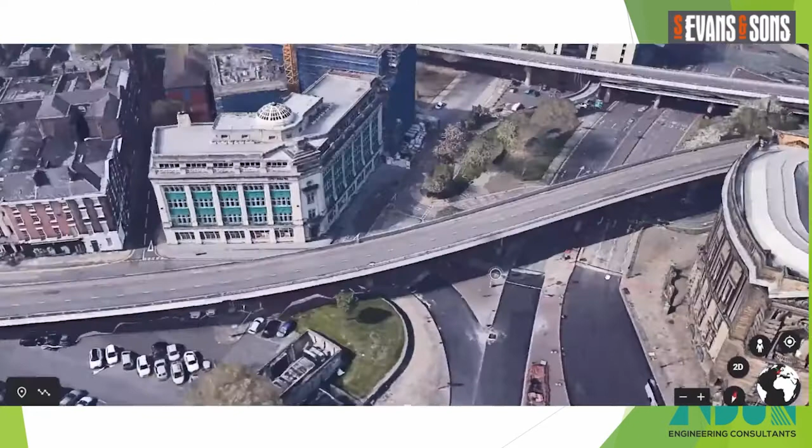That's the Mersey Tunnel, so that is in very close proximity to the project. This is the South flyover we're looking at. This is the World Museum in Liverpool, again very close and a sensitive neighbour to the project. We also had the footbridge that crossed underneath the flyovers, which was demolished as one of the first parts of the work. And now we're running back along the north flyover, and here is a university building.

And then just below, or to the west end of the north cantilever of the north flyover, is accommodation, again in very close proximity. Not a great deal of room between the flyovers and all the constraints in the city centre, plus two main roads and a railway in a tunnel underneath.

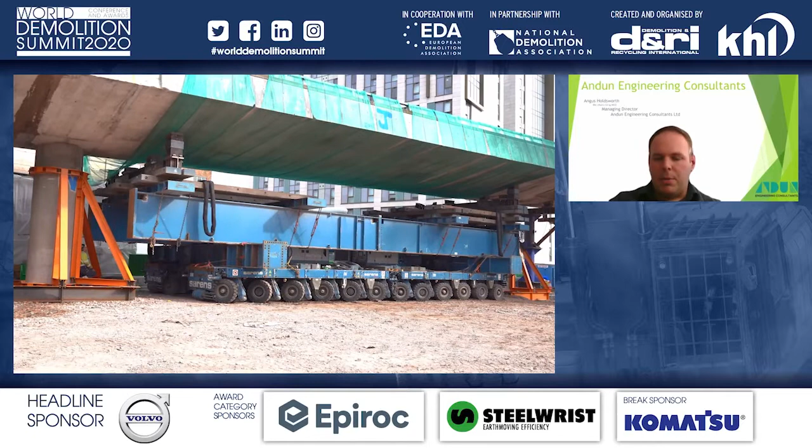Now, I've tried this presentation a few ways round. The best way is to view the video first, which gives you a flavour of what it is we're talking about. So this is an SPMT here being driven into position underneath one of the sections of the viaduct. SPMTs were used throughout to move parts of the viaduct around. That's column propping, which we'll touch on later. That's propping to the mid-span of the structure, or one of the spans of the structure.

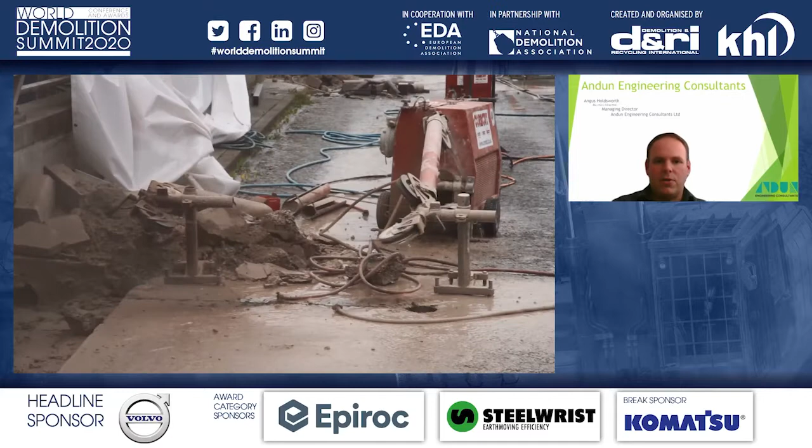That's the guys cutting it up. It was all diamond wire sawed up into pieces on top of the SPMTs and moved out. There was an awful lot of cutting on the project. That's one of the first cuts completing. That's an SPMT showing what it does best, which is move heavy loads in a very, very controlled manner in pretty much any direction you can think of. So that's with a 450-ton lump sitting on top of it.

Moving over to the SAR lifts, where it was then lifted up, dropped to the ground. So that's a SAR lift there, which we use to lift it off the SPMT, lower it to the ground, and then cut it into pieces, as you'll see throughout the presentation. That's one of the pieces being taken out onto the back of wagons and away to a site a few miles away, where it was then broken up for hardcore to be recycled as part of new road construction.

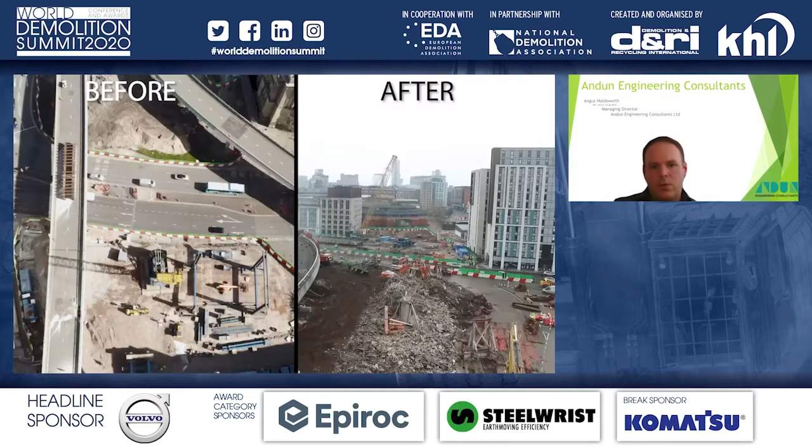The last four spans of the structure were taken out in a traditional manner because of proximity of a gas main that we couldn't get approval to load with the SAR lift. So it was all done traditionally, the last four spans on the north and the south. And you can see it makes quite a big difference. I wish they'd done the video a little bit later on with the site gone completely, but there you go, you get the idea.

Okay, so the structure itself, there were two flyovers, north and south, both around 250 metres in length each. The north viaduct up here was pretty much on a straight alignment. The south was on a curve. Fixed bearing in the centre, and then each of the piers were on roller bearings that allowed longitudinal movement and expansion of the structure. So logically, you'd want to start at the ends and work towards the centre. Unfortunately, we weren't allowed to do that, which you'll see later on.

Structure was up to 14 metres in height, an open structure, quite typical of 1960s vintage in the UK, post-tensioned, slender, long span. Columns are about 1.5 metres diameter, and as I mentioned earlier, the viaduct and the base of all of the piers, apart from the central fixed one, were on longitudinal bearings that allowed movement, which then posed stability issues when it came to the demolition sequence. There's also a footbridge here, which was in place for quite a lot of the north span.

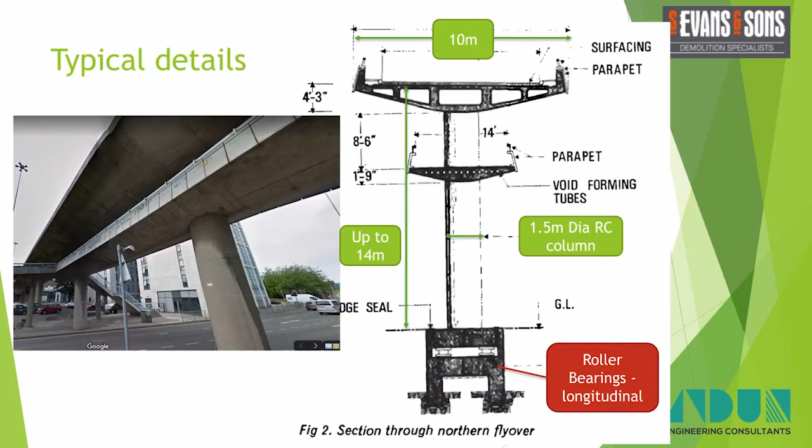Now, this structure was post-tensioned. The records from the time were not particularly clear. So it's a question as to, were they post-tensioned in individual spans? Were they pairs post-tensioned? There was a lot of uncertainty, which drove a lot of the decisions on the project. Then there was also the question, were the tendons grouted or non-grouted?

The decision was made that we would treat it or take into account the potential for it to be non-grouted. Non-grouted meaning that if you cut through the tendons, they would release and you'd lose any post-tensioning effect. To counteract that, we had a propping system, so we had a shear prop and a central prop.

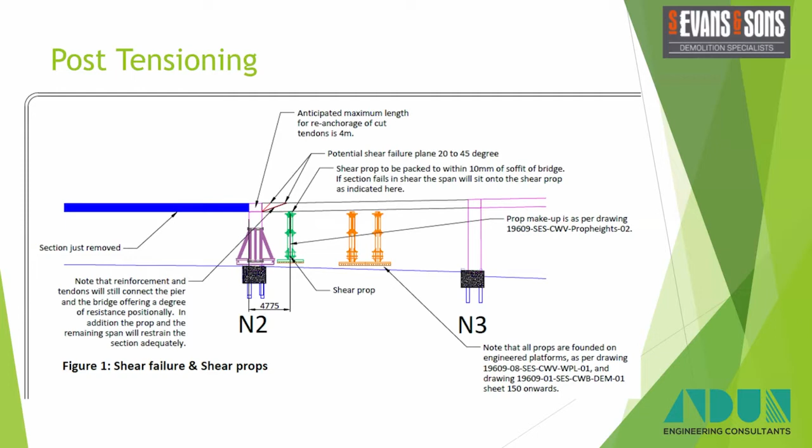This basically meant that if we lost the post-tensioning force, the bridge would sit on those props and would not cause a catastrophic failure. You can also see there the propping around the columns. Then, in simple terms, we drove SPMTs underneath it and we cut it into sections and transferred them off. So the sequence was fairly convoluted.

As I said earlier, logically you would work towards the fixed pier in the centre of the viaduct. We weren't allowed to do that due to client constraints, so we actually had to start off with this pair here. Then we had to do the pair over the road, which included the fixed pier, and then that bit there. So stability was an issue throughout.

This was then followed up by starting with the fixed pier and then working our way back down the structure. Again, stability issues that we had to take into account throughout. The props themselves were detailed specifically to fit and allow the SPMTs to get into place. So if the structure had sat down onto the props, we had to have a system where we could get the SPMTs into place, which made it fairly tricky.

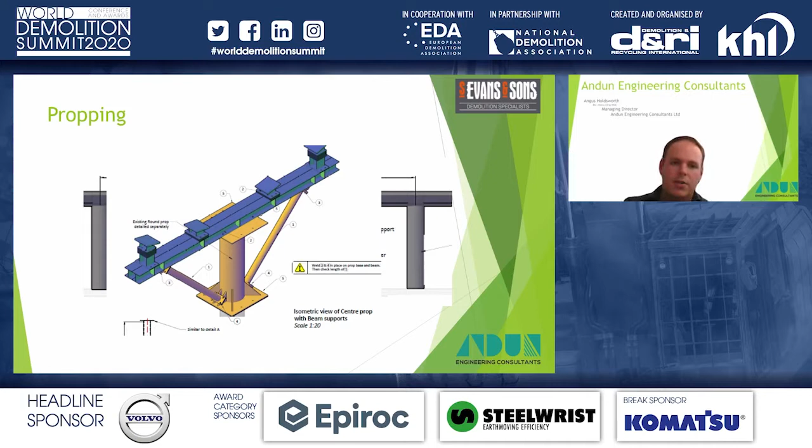So we came up with this central prop with a header beam and a series of plates that then picked up the radius under here. So there you go, you can see the propping in place, shear prop, column prop, half a column prop, and then the mid-span prop in there, and then the SPMTs could drive in here either side, same the other side, and then you can still put your arrangement in place that allowed you to carry on the demolition should the worst happen.

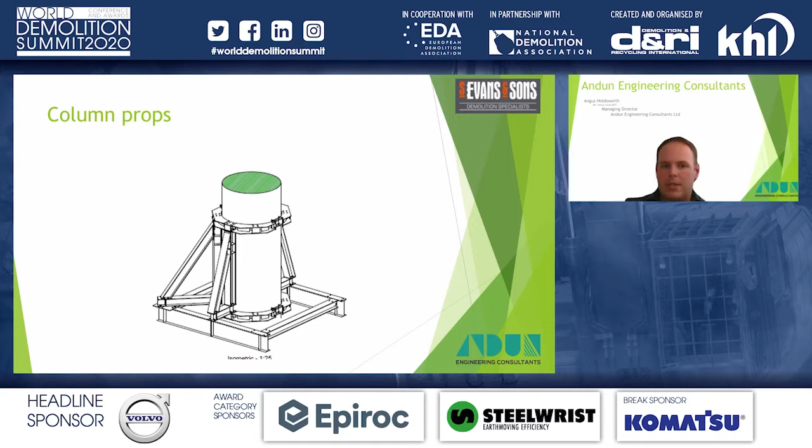Columns were on longitudinal roller bearings, so we had to come up with an arrangement to clamp those, which meant that you could slice out the bridge sections either side and leave the column and the crosshead on top. The crosshead in itself was around 50 tonnes, so with the column you were talking 60, 70 tonnes, and that solution there worked quite nicely. You can see one in place there. This one we've cut through already, so it was doing its job there already.

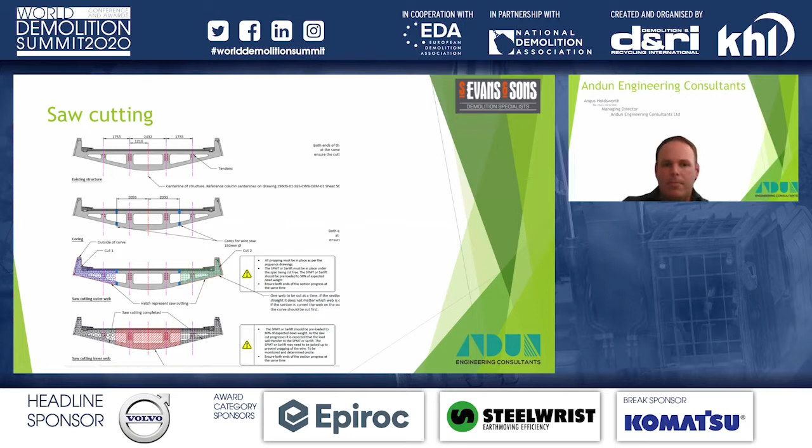The saw cutting had to be thought through, so the saw cuts were placed to give you release, so they were done at a sloping angle in two directions, so you could lift with the SPMT and then you could drive out, and as you moved you gave yourself more clearance. The saw cutting was planned, so we did the outer web, then the inner web. It was sequenced like that to ensure we didn't overload the structure or try and cause it to fall over.

You can see there where we cut through the tendon, one of the post-tensioning tendons, and you can see it's cut through quite nicely. There's been very little retraction of the tendons, so the post-tensioning itself was still active, which is as we predicted. So the propping was never actually required. It was a fail-safe.

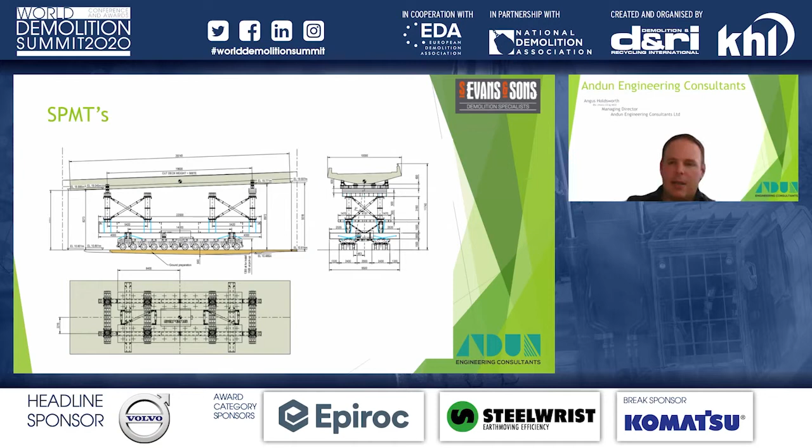SPMTs, the Sarens toys, amazing bits of kit. Have a look on YouTube and you'll see just what they can do. On top of the SPMTs, we had these header beams, which were designed with a flip-up end piece because the stroke on the SPMT was quite short. So it took a lot of thought to solve all the problems. Here we can see a little video of one coming out. I'm going to try and skip it because it's not very exciting.

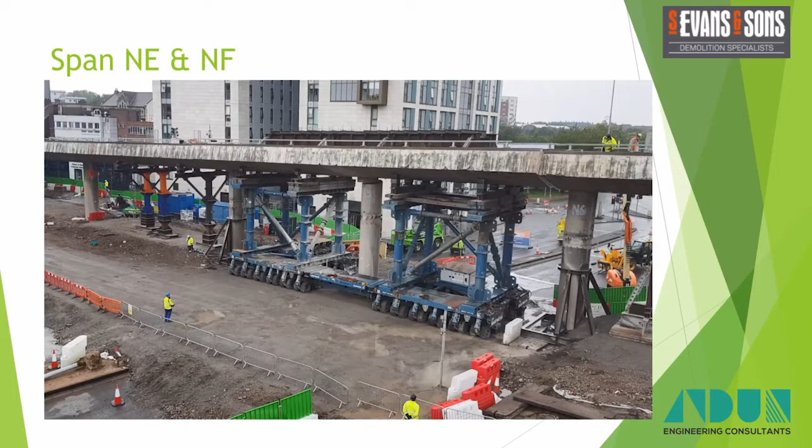So that's the central pier. That's a fixed pier in the middle there that's been lifted out. We took these two out in one span, which is why there's a big steel beam on the top deck. And you can see the SPMTs rolling out there. I'm not going to let it run because we haven't got time today, but out it comes. The wheels have all turned 90 degrees and it starts traveling off in the other direction.

Seem to be getting stuck, so I'll skip off that. Sarlifts, again, off-the-shelf pieces of kit from Sarens that can lift quite heavy loads. This one itself can lift 1,000 tons. In the arrangement we had, we needed to lift 650 as the maximum. So we had a pair of these on the site in different configurations to allow us to lift the sections of concrete off the back of the wagon, off the back of the SPMTs.

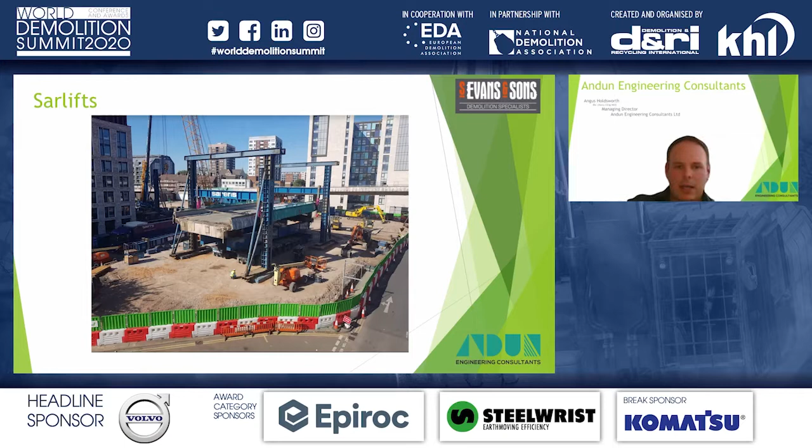There's an SPMT with a section of the flyover sitting on it, and then we lift it with the Sarlift, drive the SPMT out, and then lower it to the ground. Once it was on the ground, we lowered it onto these steel sections recovered from another site where S Evans were doing the demolition. Cut these pockets in them that allowed us to saw cut it into slices, exactly as you see there, lifted off onto the back of a lorry, and away you go.

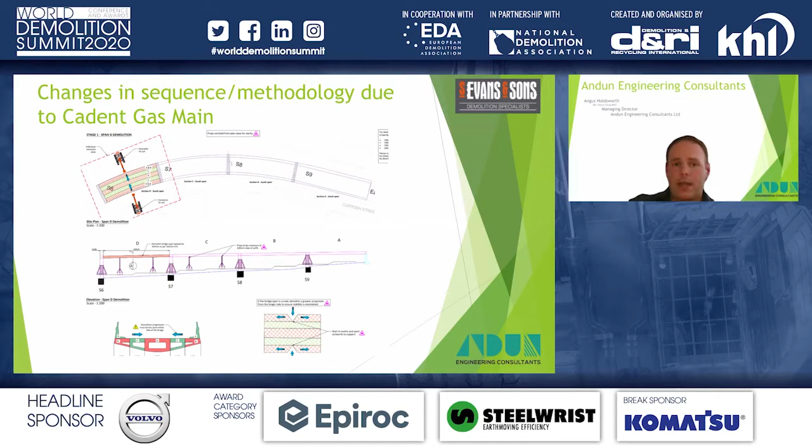The last four spans on the north and the south viaduct were done by traditional demolition in situ, using machines sitting at ground level, breaking out the deck because we proved it was post-tensioned. The change in methodology was driven by the fact there was a gas main over here and over here that we couldn't put the Sarlift system on. So the last 8 pieces were done traditionally, and that all went very nicely as well.

So to sum up a bit of a whistle-stop tour through Churchill Way Viaduct, as you can appreciate, I've missed out quite a lot of detail, but with the time scale we had available, we've had to gloss over some of the finer details, shall we say. It was a technically complex project in a very restrictive site. It was completed safely, on time, on budget, and it was delivered in a collaborative manner from all of the parties. You can see there a banner that features everybody who's involved in the project. It was a real team effort to get us over the line and get the project done safely.

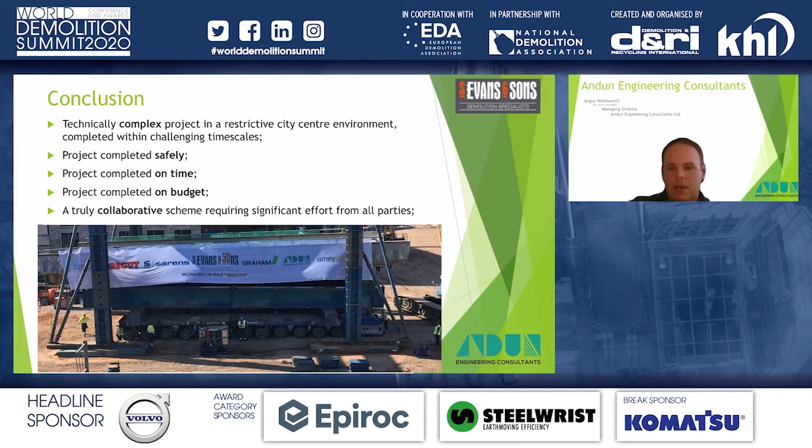And back over to you, Alex. Thank you very much indeed, Angus. That was very interesting. A question: what lessons did you learn? What was the most surprising thing you had from this experience?

Most surprising thing? That's an interesting question. I think working closely with Sarens was a nice surprise, with the kit they have available and the off-the-shelf components for moving these big lumps around. Initially we were going down the route of specially designed items, and then started talking with Sarens and the kit they've got available off the shelf for us to use in projects like this. That was a nice surprise, I would say.

Okay, we have another question that's just come in. Did you do any structural analysis before the demolition? Yes, we did. So we had to do 2 approval in principle documents for the Highways Agency. The first one covered the temporary works designs for all the propping. That was all Cat 3 checked by another company.

And then we also had to do a full analysis of both the viaducts to prove that they were stable during the demolition process. An awful lot of work went into demonstrating that the demolition process was safe for the structure, and it was checked by Ramboll. They did a third-party check and validated our assumptions and our design.

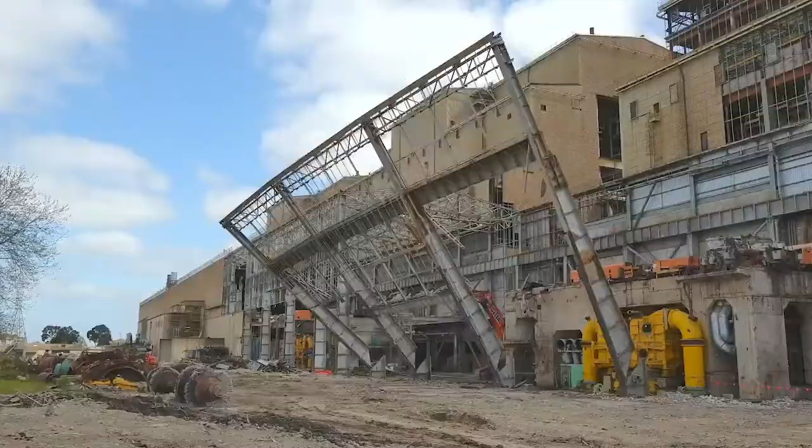The Hazelwood Power Station is probably the largest demolition project in Australian history. We commenced an EOI process on an international basis, and that was to get the best in the world to work collaboratively to deliver the project with the requirements that we set, safety principles being the driver. We then went to the market on an ITT, invitation to tender. And there were 7 possible selections made on a contractor basis, and then finally got to a selection of 3 preferred contractors.

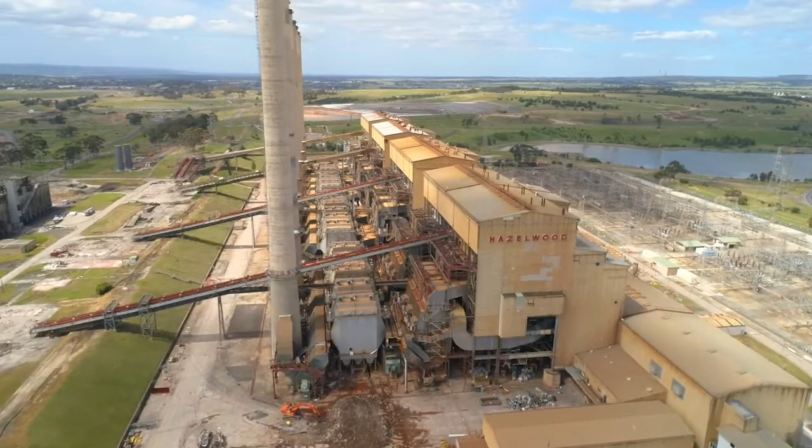The project is unique in the sense that the scale of the project was very, very heavily laid on with the disciplines that are strong about safety, quality, performance, history, and obviously the contractors that met the 3 profiles, they were the ones that we went through the final evaluation process to let the contract. And we then got to a position where we were comfortable enough to award the contract. And the contract was awarded to Delta Group.

This is the biggest one that's been done. Obviously, when the project came on board, the whole country and everyone in our industry was talking about it. Everyone wanted a piece of it, and for us to be engaged and be part of that, it was massive. It was something we never done, and I don't think we're going to do it again in Australia.

Engie took a decision in late 2016 to exit coal. So in some cases that meant divestment, in some cases that meant closure. But it's part of a larger global strategy to turn the business and point the business away from the market and more towards customers. And from a growth strategy, that means pursuing opportunities both in renewables and in energy services.

The Hazelwood Power Station was really the engine room of a lot of economic growth in Victoria for the last 50 years. It supported a lot of families, and it supported an entire community. The best way to respect that legacy is to hand an asset back to the community that they can be really proud of, that can be useful for next generations.

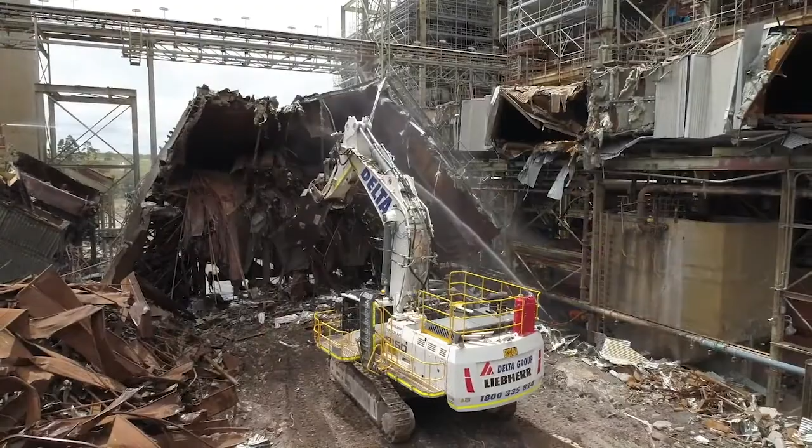Some of the works that we undertook in the first year were clearing of fans, ID fans leading into the chimneys, as well as 24 precipitators set along just at the back of the chimneys for the whole length of the 8 of them. That was a process in itself. I mean, we're not talking about structures that are 5, 8, 10 meters high. They're very heavy, 450 ton structures each with a reach of 28 meters.

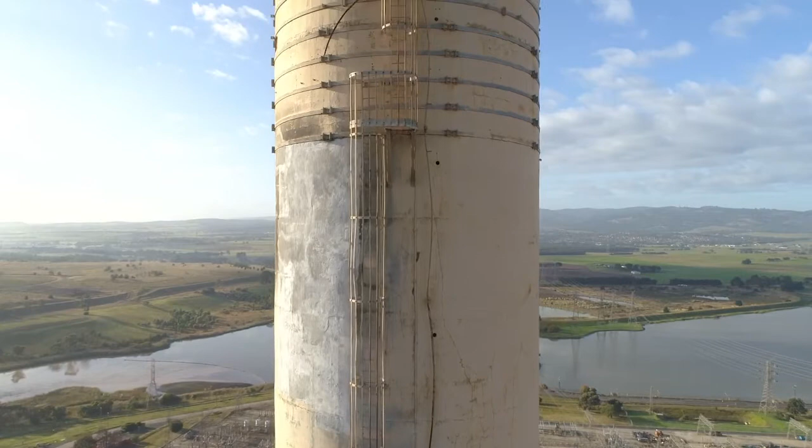In Victoria, we are bound by a regulation via WorkSafe, where we need to explore every other possibility before we undertake an explosive demolition. That is written in the code, and we have to prove to WorkSafe and authorities that we have looked at other methods, and we deemed explosives being the safest method.

So you look on YouTube and you can see videos of chimneys coming down, 1 or 2. I've never seen one with 8. To drop all 8, we looked at different sequences, whether we drop them all together, whether we drop them vertically, drop them in which direction, the timings and all of that. And obviously you've got a limited amount of space.

The number one rule is that we couldn't shake the ground too much. Vibration was absolutely essential because they're critical assets very close to the chimneys. And if we were to vibrate the ground too much, there's a control room there, which is critical for the whole state of Victoria. So it was March 2020 when we had everything ready to go.

The stage is set, and we now have to bring the guys from UK and obviously deliver the final stages to bring the stacks down. A travel ban will be placed on all non-residents, non-Australian citizens coming to Australia, and that will be in place from 9 p.m. tomorrow evening.

We cannot shut down. We need to deliver this project. We need to go ahead. We can't have another go at this. You just couldn't make this stuff up. We are literally on the other side of the world, and the border in Australia is closed.

And we had to start looking at plans B, C and D. We had to bring the stacks down in the period of time, and there was no other way. There was no other option. There was no delay. We could not accommodate another time for it.

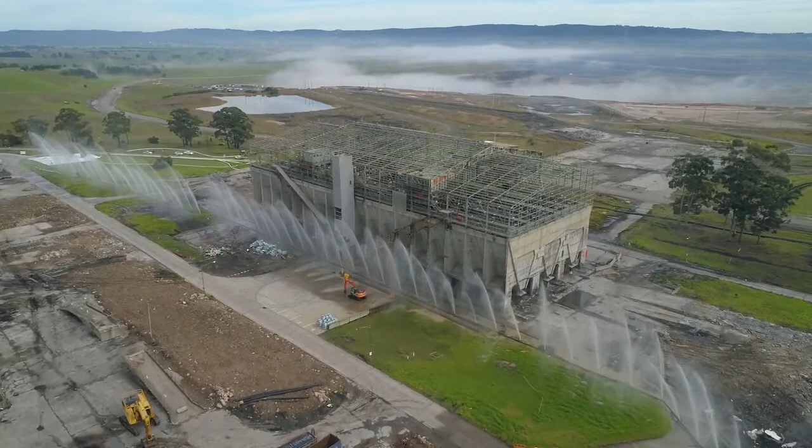So we had a window during which we could actually do the demolition, and that was based on the weather. And so we had to worry about the fire season and make sure that we were outside that, but also only a few kilometres northwest of the chimneys and the site is the town of Morwell. And so we couldn't have any dust going in that direction, so we had to pick a season.

And so we were literally looking at years' worth of historical data, looking at where the wind's going from. And we saw that there was actually only a short window during the year in which the wind was blowing in the correct direction for us. So the output of the predictive modelling, the dust modelling, told us that we needed a set of wind conditions, an easterly on the day, 10 kilometres an hour as a minimum speed.

So 12 days out we started looking at the weather forecasts and tying that in with the scheduling and all the preparation works that needed to occur ahead of demolition as well. I believe it's a first where this level of predictive modelling has been engaged in preparation for a fall event in the licensing approvals process.

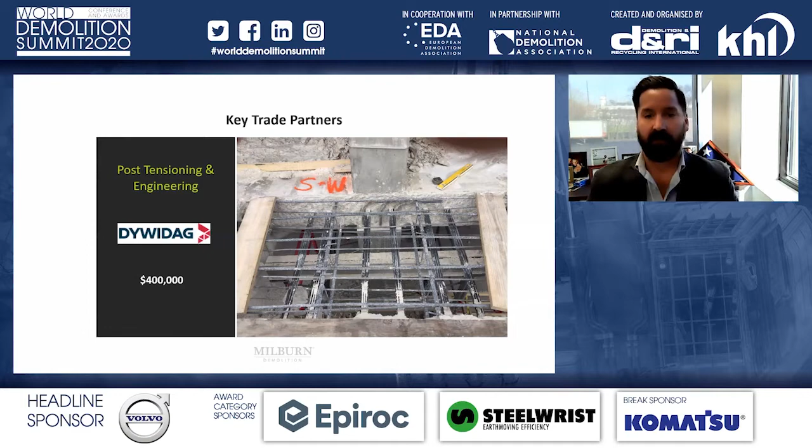A couple of key trade partners I want to focus on, or at least acknowledge, were our crane service provider, Stevenson Crane, and they had around $250,000 in work for us on this project. Shoring and bracing, Gilco Scaffolding, about $250,000 in contract values on this one as well. And then probably the largest key trade partner on this project was our post-tensioning and engineering partner, DYWIDAG. I apologize if I pronounced that wrong. Their contract came in around $400,000.

So a brief overview of phase 1 included a full interior strip out of all the buildings. As Alex mentioned, there are 4 buildings, A, B, C, and D. After the strip out was done, we shored the post-tension beams in building C in order to be able to demolish buildings B and D. Removal of precast facade from buildings B, C, and D. Detensioning, separation, retensioning of the beams at column lines 12 and 9, and the full demolition of buildings B and D down to grade. All concrete from the project was also crushed for reuse on site.

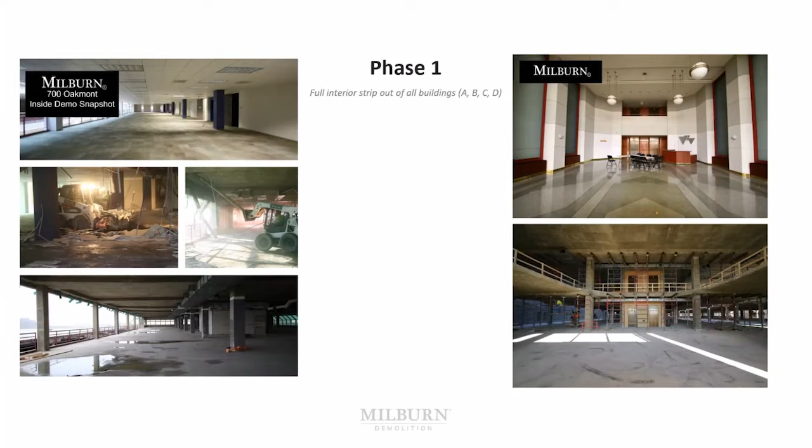A little bit of a snapshot of kind of before and after what the inside of those buildings looked like. They were commercial office usage, so pretty typical finishes that were removed throughout.

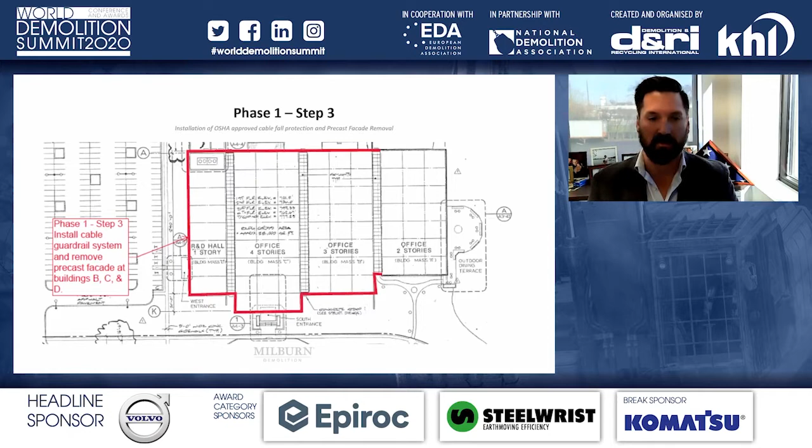So the third step was we had to install cable fall protection so that when we removed the precast facade, there was no fall hazards present. And then immediately following the cable fall protection install, the precast facade was removed. Got a little video of that. And this is of one of the buildings, building C, I believe.

It's showing us prepping and picking the precast with a 90-ton all-terrain crane. We had approximately 350 crane picks on this project, which occurred in an 8-day period.

And as you can see, that was a time lapse. I wish it would have gone that fast in real life, but that took a little bit longer in real time. That was, however, I believe half a day's worth of picking on our end. Oop, I don't know what happened there.

Okay, step 4. So this gets into the complicated part of the project. This shows the overview of the bridges between buildings C and D. Building D at the top was to be totally demolished. And as you can see, the bridges that were connecting the 2 buildings were cantilevered out from building C, which was to remain. So this occurred at 2 bridge locations on floors 2, 3, and 4. We had to shore up underneath them.

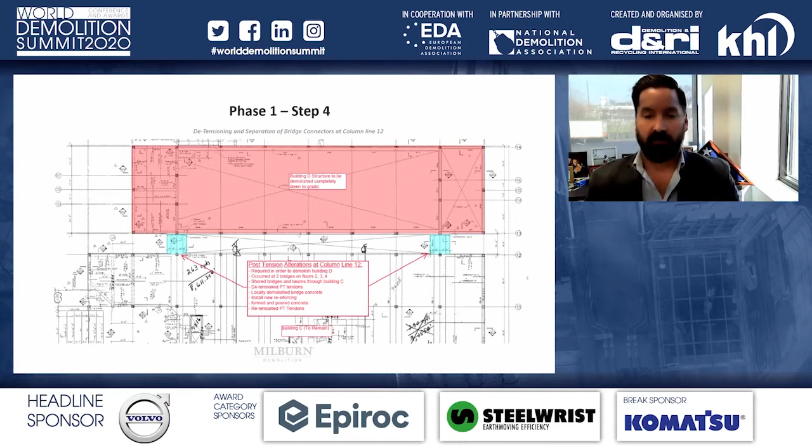The general scope was to expose and detension the tendons after shoring was installed, locally demolish the bridge concrete, install new reinforcing, form and pour concrete, and then retension the tendons in order to allow building C to stand on its own. Here's a little bit of a zoom shot.

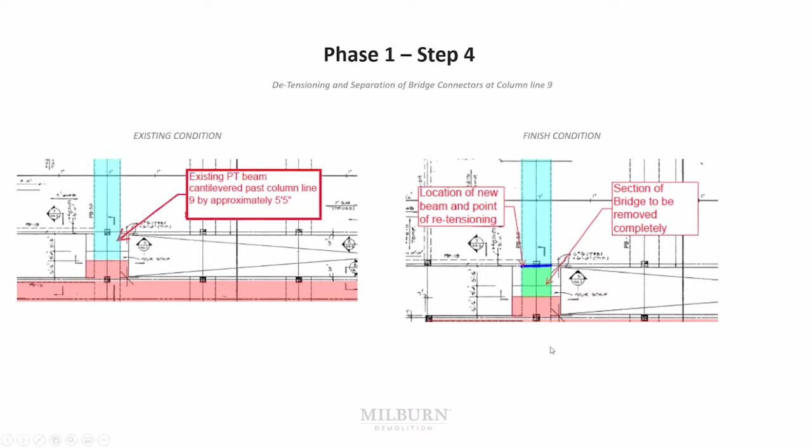Here is another time lapse that shows, once the detensioning and retensioning was completed, the demolition of buildings B and D. B being on the right, D being on the left.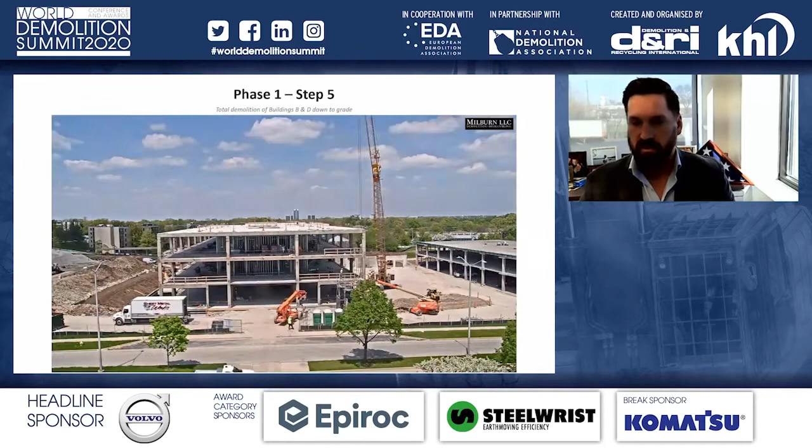Towards the end of the video, you can see how they're setting up cranes and concrete pump trucks to enable the reconstruction of Building C. Off to the right, you can see Building A, which was basically fully gutted during phase 1, but sat vacant while they figured out what they wanted to do with it, which led to phase 2.

Let's see. I won't show this video, in essence to save some time here, but that's just showing how we crushed all the material on site in the parking lot adjacent.

Let's see. Phase 2 of the project was in 2020. We came back. We completed the gut of shaft walls and remaining MEPs in Building A. We removed the precast facade from Building A, and then we created a large roof slab opening for a new HVAC system.

There's a little picture of us coming back for the gut. That's the precast removal. And that is showing the roof opening that we had to create on Building A.

So the challenges to this project. We had 3 major challenges. First challenge was the schedule on the project. Second challenge was logistics for the Building A precast removal that occurred in phase 2. And the third, and probably the most in-depth challenge I'm going to go into here, was the post-tension beam and slab alteration scope.

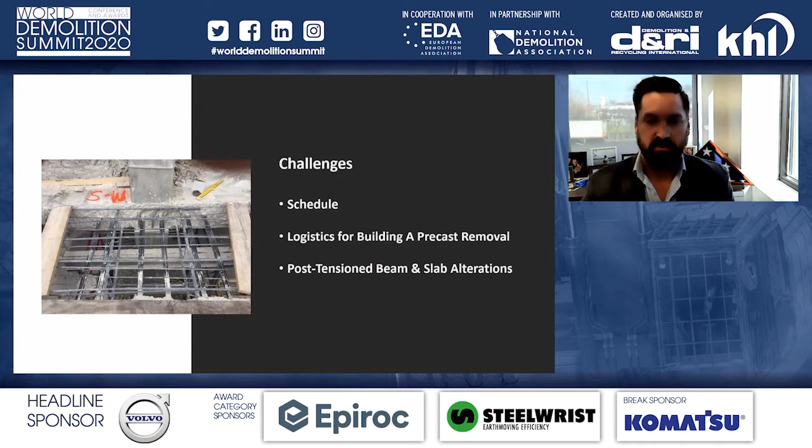So first and foremost, the schedule. Phase 1 schedule was 4 months for all scopes. We were not the low bid on this project. The low bidder couldn't commit to the schedule, and so Ryan came to us. And while the schedule was extremely aggressive, we put a plan in place to meet their schedule, and thus were awarded the project.

Second challenge was the precast removal. Building A had a pond to the east, which we were told by the village we weren't allowed to touch, and nothing was allowed to get dropped in it, or we'd be in trouble with them. So it required a 550-ton crane with a luffing jib.

And in addition to that, phase 1, Building C that you saw on a previous slide, was now occupied, and so was the parking lot next door. So logistics became a little bit more challenging. In these photos, you can see from across the pond the large crane setup that we had to use for this portion of work.

We had to mobilize this crane on a Saturday, which caused a major increase in permitting and overall logistics and setup costs, which we had accounted for in our bid. And the larger pieces of precast on the east face were approximately 25,000 pounds, which is why we needed such a large crane, due to the distance away from the pick point.

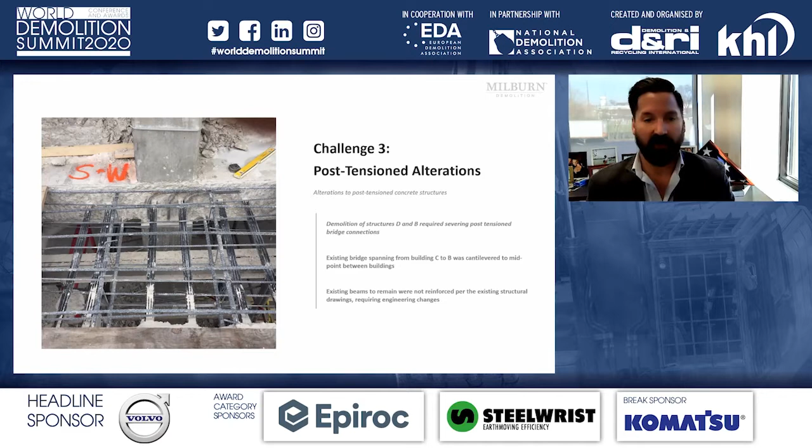This only ended up working at 2 locations. I think 6 of the other locations required this updated plan where they had to shrink the overhang in order to accommodate the new facade that was being installed. As you can see, the overhang limit was reduced from 18 inches to 3 inches. So that required a few changes.

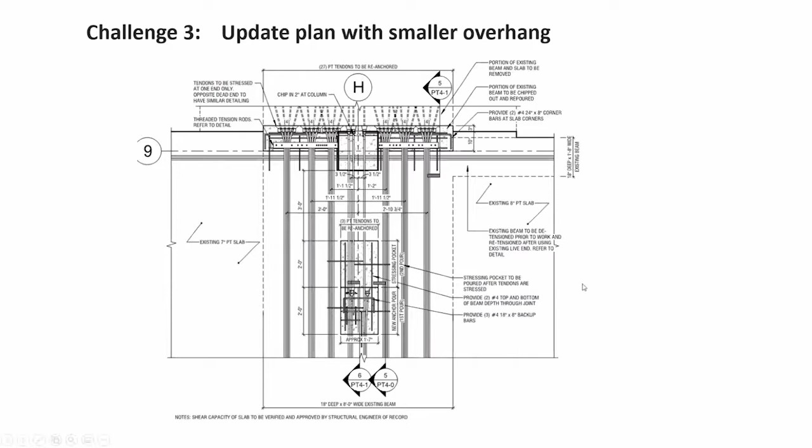The first one being we were required to custom fabricate anchors, because in order to spread the weight of the post-tensioning work, the anchors had to be much closer together. This plate, while it doesn't look that complicated, is very hard to manufacture. Luckily in Chicago we have somebody close that was able to turn those around fairly quickly to avoid major schedule impact.

Then due to this anchorage change, it required a bursting steel modification. Traditional rebar reinforcing was not going to work at these locations due to the lesser space to work with. So we ended up using tension rods welded to steel plates, and this eliminated congestion that we were running into with typical rebar methods. It also allowed us to make the parts fit around the existing PT without interfering with their existing locations.

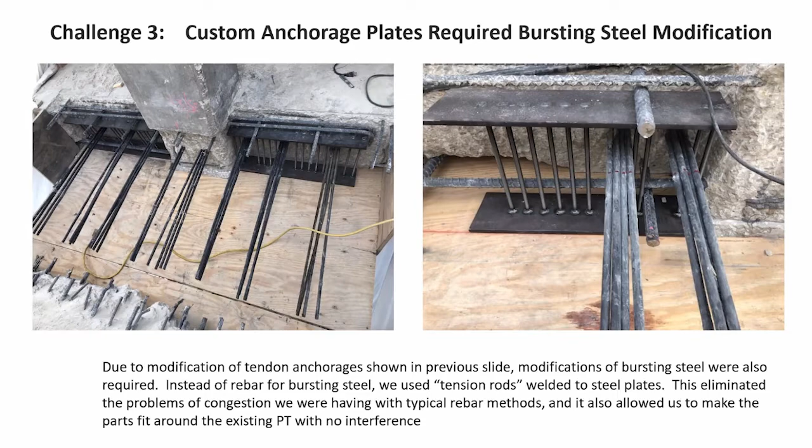And the third setback we had was that 2 of the locations, I believe, had an issue with the post-tension anchors running through the column at the perimeter of the structure. The only way to accommodate the 3-inch maximum overhang was to actually create a pocket in the slab inward of the column and create a new place to retension cables. As you can see there on the right, that's showing you those pockets that were created.

The other challenge, which will probably go back to schedule more than anything, is due to the initial kickoff delay, we hit the winter months in Chicago with a fully gutted and facade-removed structure. We had to create tents and install heaters and make sure that the concrete pourbacks were kept to the right temperatures so they could get to strength. In a couple of cases, this also required us to have a monitor on site 24 hours to make sure there were no issues with the heaters or the tents.

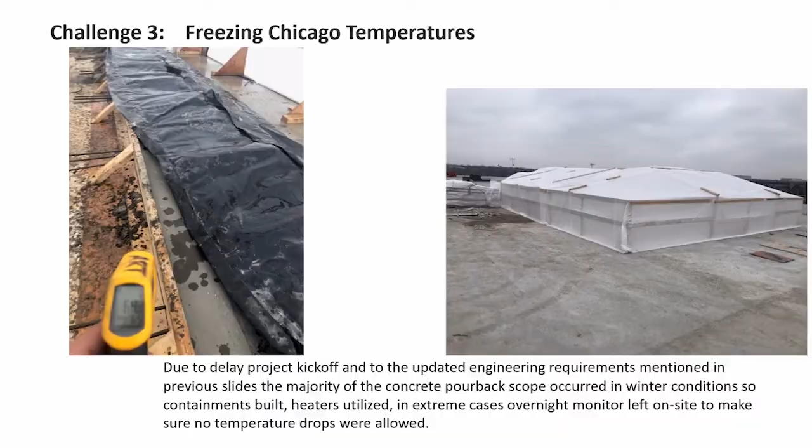I'll show an overview video of the whole project so you can see it kind of start to finish.

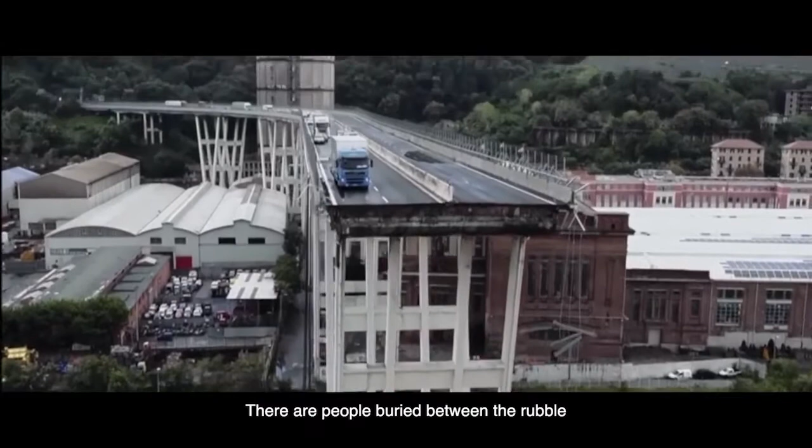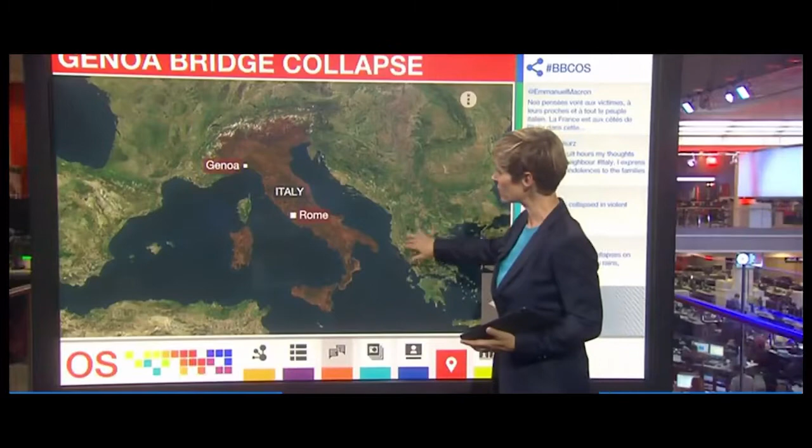When, on the 14th of August 2018, a 210-meter section of the Morandi Bridge collapsed, Genoa was put in need by one of the saddest tragedies ever occurred to this ancient and glorious city. Since 1963, the bridge was not only part of the modern landscape and architectural representation of the city, but due to its location, it was one of the major links from Italy to France. After this tragic event, the city of Genoa, supported by the Italian government, decided to give a boost in accelerating the procedures of demolition of the bridge.

Fagioli was called together with other expert operators for the removal of Morandi Bridge sections, including experts in structural and architectural design and companies specialized in environment reclamation. Fagioli used tower lift and strand jacking system, crawler cranes used either for the lifting and lowering of material and as a support for Fagioli equipment, and SPMTs to mobilize the sections at ground level.

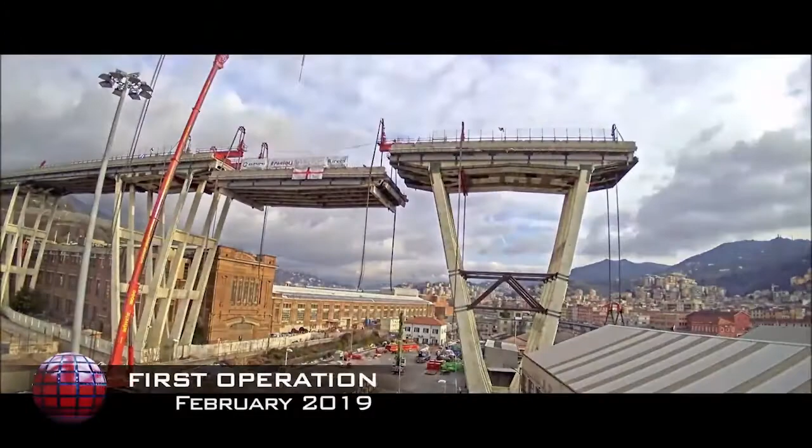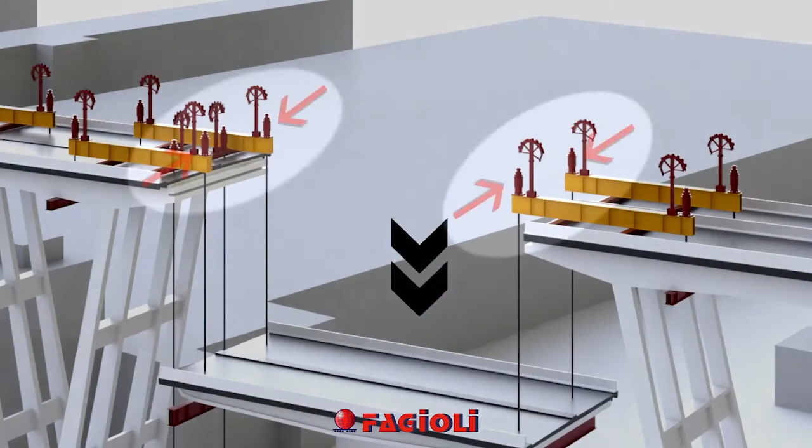Fagioli started the operation of the removal of the Gerber beam number 8, comprised between V-shaped piles number 7 and number 8, weighing about 916 tons, with a length of about 36 meters and 18 meters wide. Fagioli used 4 by 600 ton capacity strand jacks, 2 strand jacks on the western side bridge pylon and 2 on the eastern side, to lower the central bridge section. The jacks used for the lowering operation were positioned onto cantilever beams, provided with additional 4 strand jacks, 180 ton capacity each, with the task of balancing the whole structure.

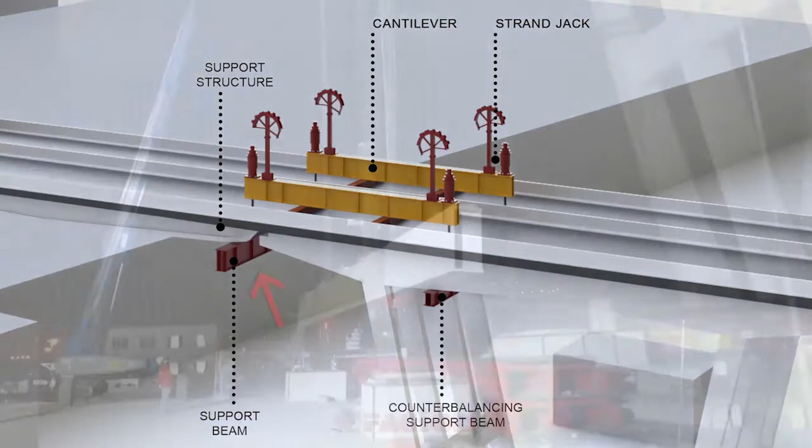2 counterbalancing support beams were transversally positioned underneath the western and eastern bridge pylons, in order to anchor all the lifting and lowering structure to the west-east bridge sections. 2 support beams were positioned underneath the Gerber beam section. On the eastern bridge pylon, another structure was positioned at the top end of the bridge with 2 additional strand jacks with counterweights, with the task of providing a counterbalancing action during the lowering.

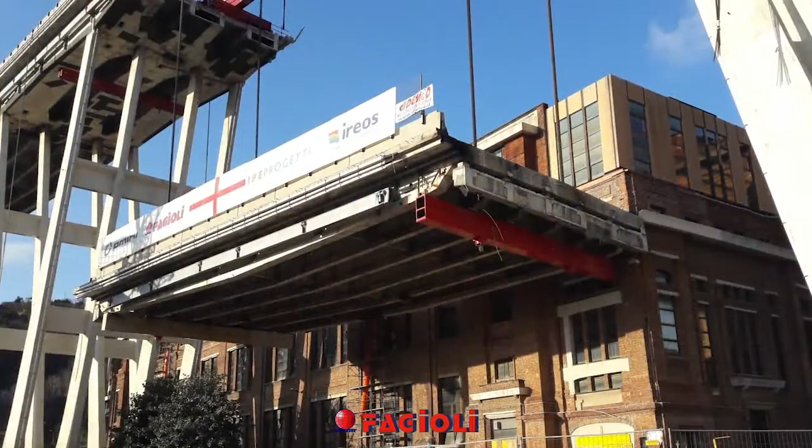Following the same procedure, position of the counterweights and strand jacks, removal of deck constraints such as fixed and mobile joints, lifting action of the beam by a few centimeters, cutting operation with diamond wires, beam number 7, 850 ton, beam number 6 and beam number 5, each weighing 916 ton, were lowered by strand jacking system in 2 months. By the end of March, deck beam number 4 was lowered and touched ground.

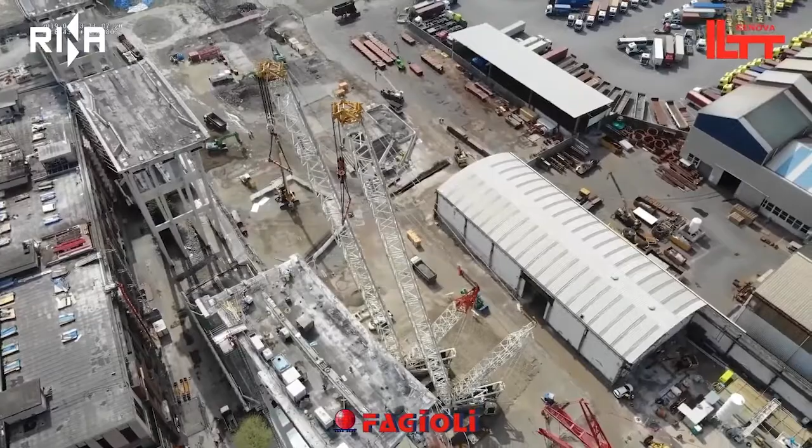In the meantime, on March the 18th, 5 cranes arrived in Genoa to be used for the dismantling operations of the western piles. 2 main cranes have a capacity of 600 ton each. The V-shaped pile number 5 was the first pile to be demolished on the west side of the bridge. The operation started with the removal of the lateral parts, the sidewalks.

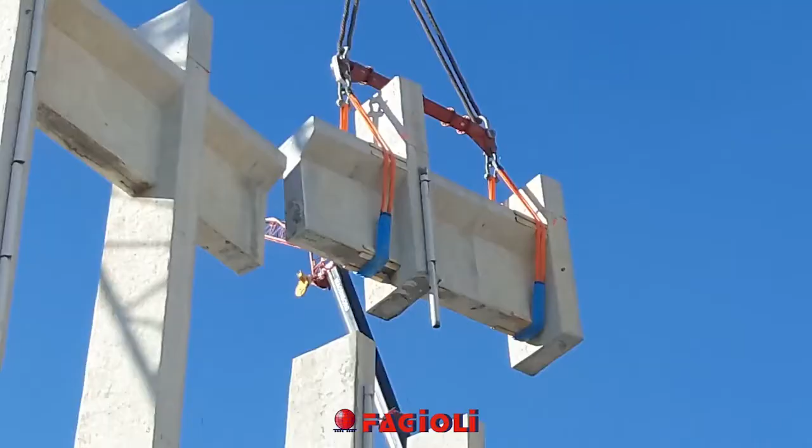The deck was sectioned in 3 parts in the longitudinal direction. The first section, weighing 300 ton, was lowered on the 16th of April, the second on the 19th of April and the third on the 26th of April by crawler cranes with a rotation action. After the 3 portions of the deck beam, the pillars were also sectioned to 2/3 of their height by oblique cuts and sections taken away by Fagioli SPMTs.

In the same way, pile number 4, end of May, pile number 7, first half of June, pile number 6, first week of July, pile number 3, end of July, and pile number 8, early days of August, were dismantled and sections taken away by the SPMTs. Beam number 11, weighing 750 ton, was cut and lowered with jacks by the end of May.

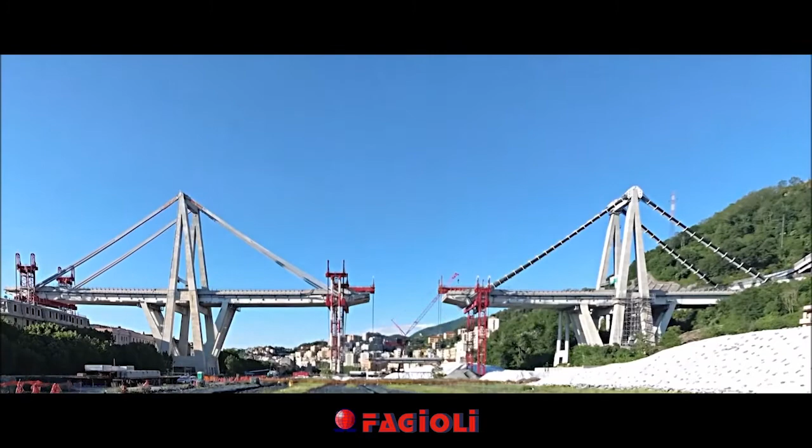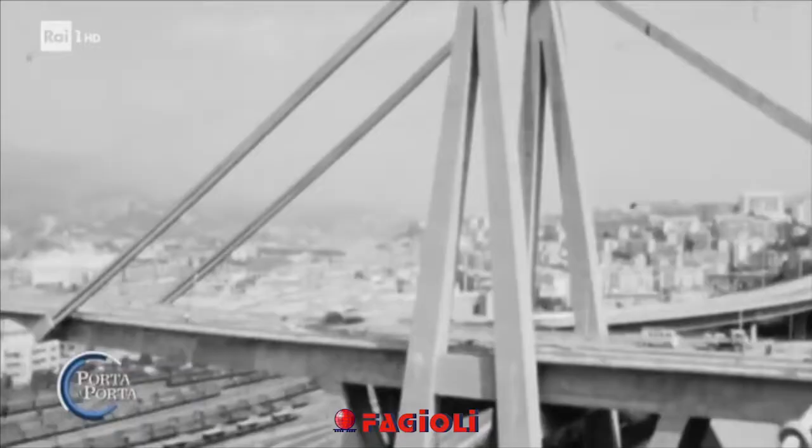Demolition works on complex structures require a relevant planning effort, as in many cases we need to operate on civil structures conceived and built many years ago, with different regulations compared to nowadays requirements. This is the case of the Morandi Bridge, one of the highest expressions of the Italian engineering capacity in the field of pre-stressed concrete structures back in the 60s.

The partial collapse of the structure determined a situation of anomalous static balance and potentially risky condition in the remaining structure. Consequently, the procedures adopted for the dismantling of the bridge involved detailed preparatory phases of securing and functional testing of the remaining structures, in order to ensure that the operations would take place in conditions of maximum safety and stability.

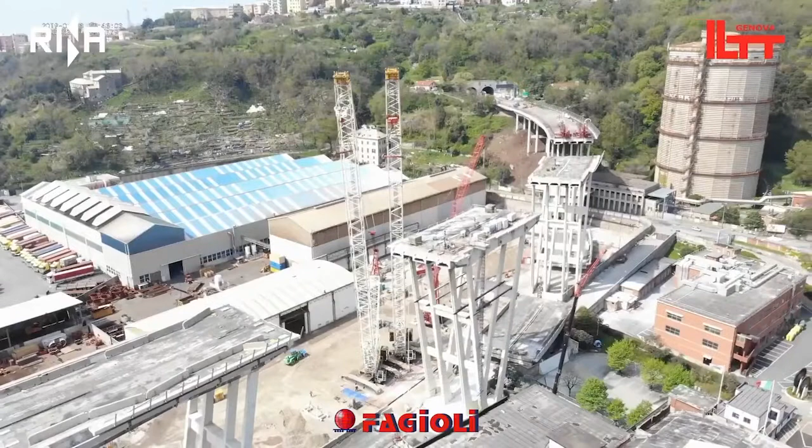The viaduct was divided into distinct sections with different structural peculiarities. To the west side, the viaduct consisted of a series of 8 piles with inclined V-shaped columns embedded at the base, with an average length of 36 meters and a height of 45 meters. To the east side, there were only 2 large cable-stayed piles with cantilever spans, total length of about 180 meters and total height of 90 meters.

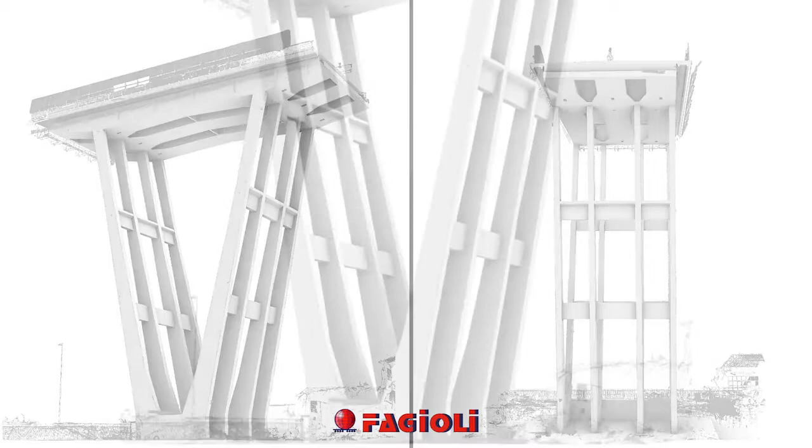Fagioli proceeded with repeated load tests carried out by detecting the deformation of the structure. In order to identify the conditions of post-incidental stress and the residual resistant capacity, the entire work was modeled on finite elements and calculated in all its temporal phases, from construction to collapse up to the representation of all the intermediate steps of the planned dismantling operations. The rheological effects, deformation and flow within a material, of post-compression were assessed with laser scanners.

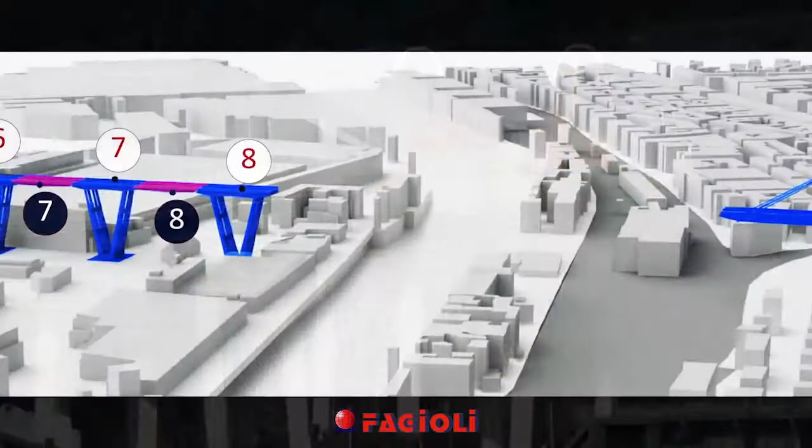Steps were taken to restore the balance of the surviving structures, which resulted to have high asymmetrical loads due to the lack of the collapsed structural elements. This is the case of pile 8, which due to the loss of the girder beam on the eastern side was in a strong unbalanced condition.

The rebalancing operation was performed by applying external forces at the support of the collapsed pad, of an amount equal to the weight of the latter. The external vertical load, equal to about 300 tons, was applied by means of two cable recovery jacks, positioned onto the cantilever beam of the pile, contrasted at the base by a counterweight of adequate mass. The piles were previously reinforced in order to guarantee more safety.

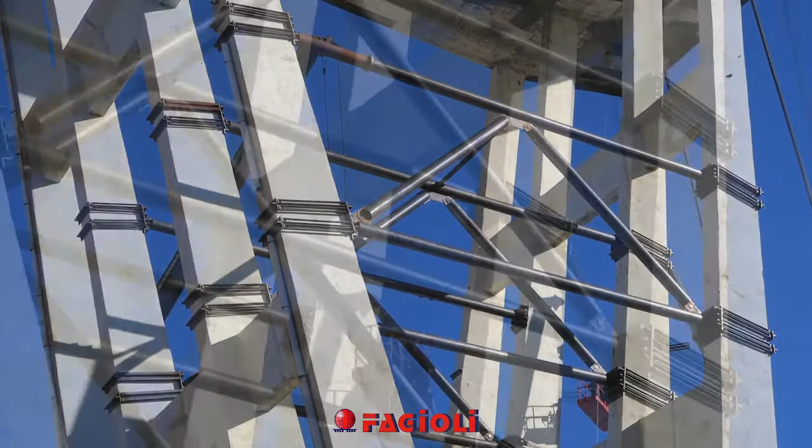Once the safety and functional tests were completed, the real demolition phases began. To the west side, the 8 piles and the related girder beams were dismantled in pieces. For the dismantling of the girder beams supported by the V-shaped piles, a metal structural work system was designed, resting onto the piles. The lifting system, positioned at the end of the cantilever bridge section, raised it gradually in order to allow the cutting of the support onto which it was placed and lowering it to the ground.

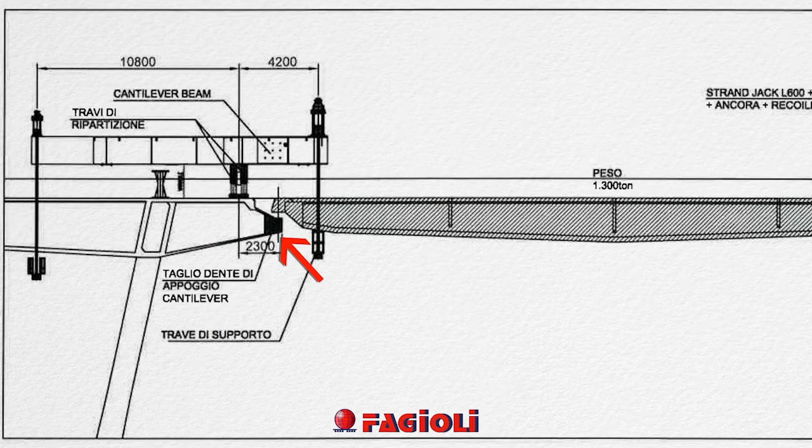The positioning of strand jacks opposite to the lifting one guaranteed stability. The support system of the Fagioli cantilever beam system was designed to distribute the load onto the pile in an isostatic and uniform manner, able to perfectly transfer the 250-ton load of each of the 2 strand jacks onto the 3 beams of the pile. The load transferred to each concrete structure was applied by support, that is by contact from below, and not by traction.

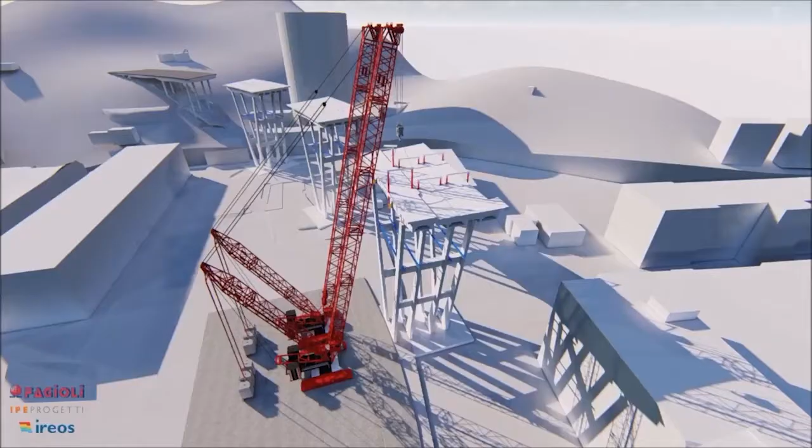This kind of methodology required some holes, executed with core drilling machines, avoiding plastering elements of carpentry onto the reinforced concrete. This action increased safety on site. This activity was carried out by making longitudinal cuts in the concrete structure, about 36 meters long with thickness up to 3 meters, using Tyrolit diamond wire, specifically designed for reinforced concrete processing.

The whole concrete structure was divided into 3 large blocks with a weight suitable for lifting by means of 2 Fagioli Demag CC 2800 crawler cranes in SSL configuration with 78-meter boom, superlift 300 ton at 13 meters. Due to the shape of the pile, before it was cut, it was necessary to support it with the cranes, which maintained for the entire duration of the cut a weight close to 100% of its weight.

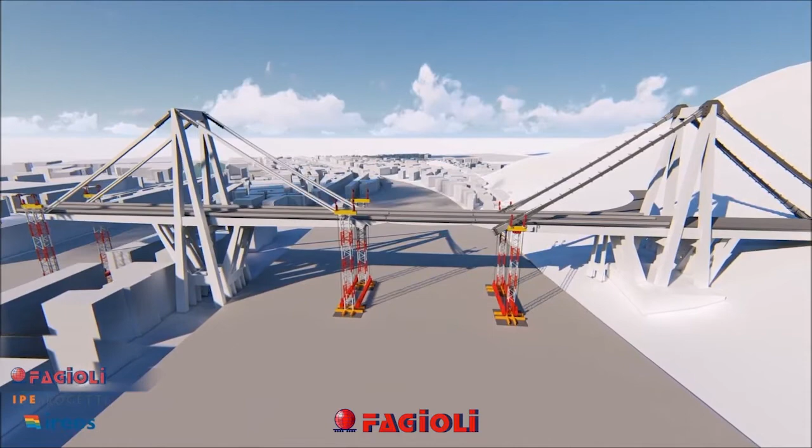As for the 2 piles on the eastern side that survived the collapse of the third, they were much higher and more complex to be handled compared to the piles on the western side, as they were cable-stayed with large cantilever beams. 3 pairs of Fagioli lifting towers were erected, 2 for pile 10 and 1 for pile 11, each 50 meters high, positioned on specifically cast concrete foundations. Lifting towers had the function of temporarily supporting 3 cantilever beams of the piles from below in the event of structural collapse of the stays.

The support beams also applied a vertical load upwards of about 600 tons to ensure a rebalancing of the loads. The lifting towers and beams were therefore designed for 2 load combinations. The first, called service, with loads imposed by the hydraulic system on the concrete structure equal to 600 tons per pair of towers, and the second, called extra heavy, with loads imposed on the hydraulic system from the concrete structure equal to 2,400 tons per tower pair.

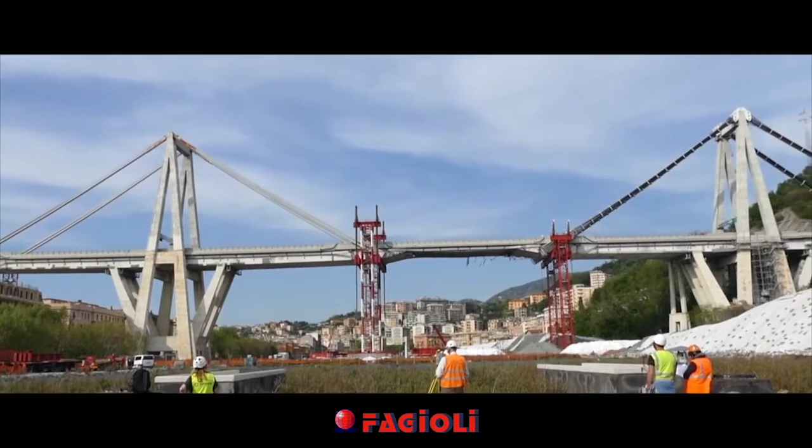In order to increase precision and constantly monitor the load transmitted to the reinforced concrete structure, a reading system with load cells was also adopted, with an accuracy of 0.5%, with readings 24 hours a day, 7 days a week. The system was mounted at the base of each jack. The securing operation allowed the removal of girder beam 11.